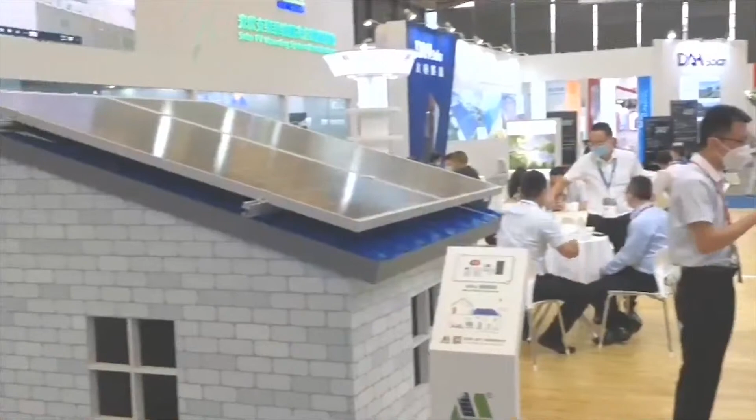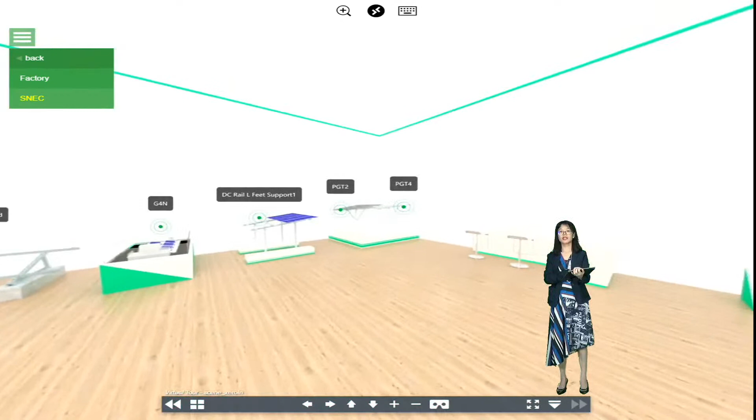To show more details of our roof mounting systems, I would like to bring you to our virtual stand to introduce more details. Now I am at the front of our virtual stand. Okay, let's go inside. Now I am inside our virtual booth, almost exactly the same as our real stand. I'll just bring you around.

Sorry, it's stopped due to the software reading speed, but no worries, let me try to go back. Okay, we go inside again, trying to go ahead. Okay, it seems the speed is much better now.

This year we have displayed our TPO new soft rooftop solution and our adjustable tripod. Alright, it seems the virtual booth is not very smooth.

Now it's working. As we can see, we have a trapezoid metal roof support, a tile hook system, and we're trying to zoom in. We have a symmetrical roof mounting matrix. Let me show a little bit of detail about the trapezoid roof solar mounting system. So it's going, it's operating. Okay, great, we get this model.

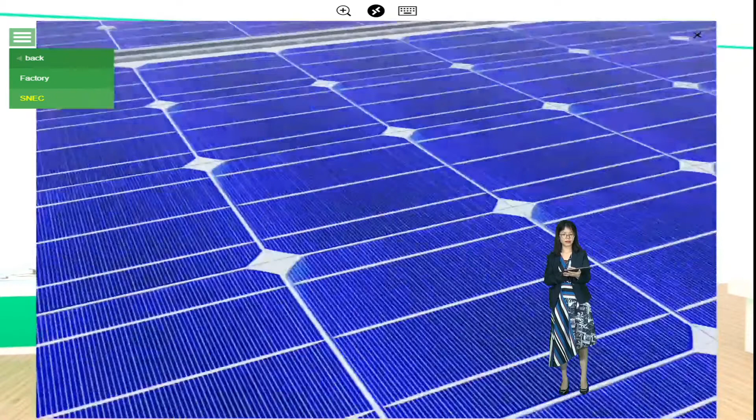Okay, trying to make the direction better so that we can see more details. Alright, this is the system combined with a trapezoidal roof clamps with the L-feet and MA rail. And since the software is not very smoothly operating, so it's okay.

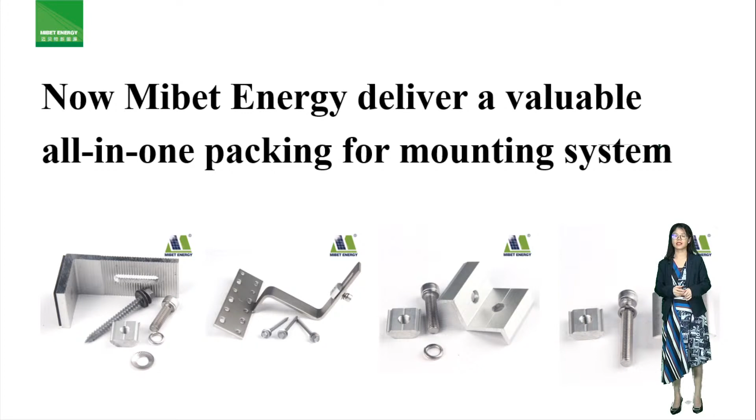So now Mibet, our company, Mibet Energy, delivers a very valuable all-in-one packing for mounting systems, no matter for L-feet system for the tin roof, the tile hook, or the tilt legs for flat roof and the low tilt angle metal roofs. So what is the all-in-one Mibet solar mounting system kit?

We can calculate by panels. Like one item, a 4-panel kit, we only need to have 2 pieces of rails with 1 box of tin kit, or 1 box of tile kit, or 1 box of tilt kit.

Also, because you know the rail is lengthy, usually standard length is 4.2 meters, and for other components like middle clamp and end clamp which are small components, for better warehouse management and transportation, we also can separate the rail from the other components, all items in the same kit. Let's go to the next part.

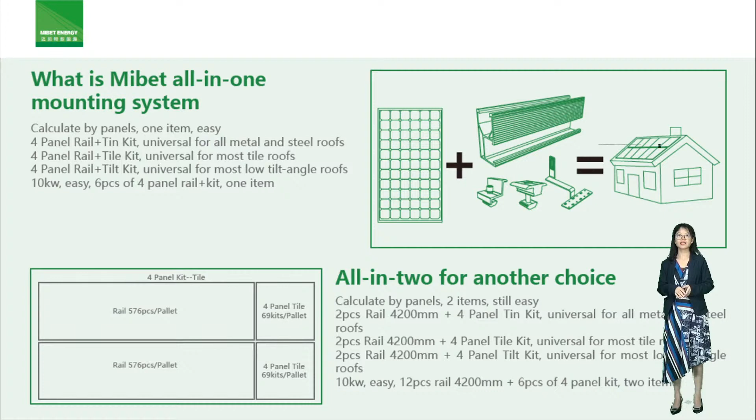For example, this is our 4-panel tile racking system. That means we include all the components for a 4-panel installation, 2 pieces of rails. For technical data, we can achieve installation for 5 to 45 degree tilt angle of the roof itself. For design standard, we have Australian standard, JIS standard for Japanese market, British standard, and American standard.

Packing, we usually pack in 4-panel kits, around 800 kits for a 20-feet container, around 2,000 kits for a 40-feet container. Okay, we go to next part.

So this is the list example for both portrait type panel installation and landscape type for 4-panel tile kit installation. As you can see, we not only include the basic installation components like rail, rail joiner, end clamp, middle clamp, tile hook, we also include the grounding components and cable clips to make everything in the same kit, considering the safety factor and better uniform installation for the DC cables. Okay, let's go to next part.

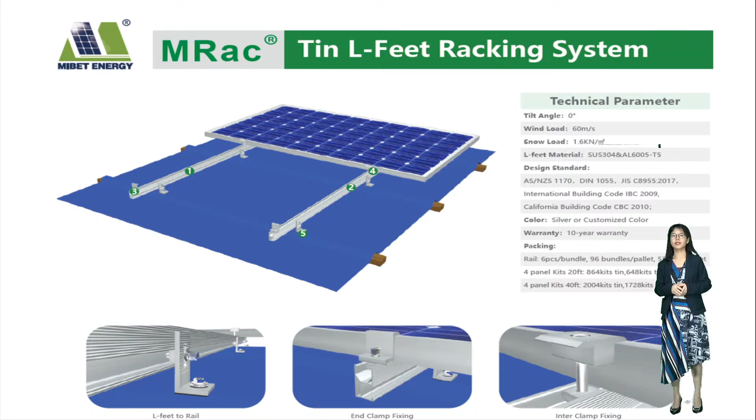We also show the example of the tin kits list, components list for 4-panel, 6-panel, 8-panel, 10-panel, and 12-panel. These 5 types of panel quantity are the most universal and most hot-selling ways of combination of solar panel quantity for the tin kits and also for tile kits.

Except the silver kit, we also have a black color available for our rail joiners and clamps, L feet, all the aluminum components. As we know, more and more solar module frames are using black color now.

So when the metal roof's tilt angle is only like 5 degrees or 3 degrees, very low tilt, if we only install the tin kit with L feet, the reflecting degree from the angle of the solar module to the light is not so good. Then the power output for the solar module will be affected.

So we have another very smart system we named the tilt adjustable racking system, which can achieve 10 to 15 degree installation, 15 to 30 degree installation, and 30 to 60 degree installation, suitable for most markets like Europe, USA, Australia, Southeast Asian countries, African countries, and South American countries.

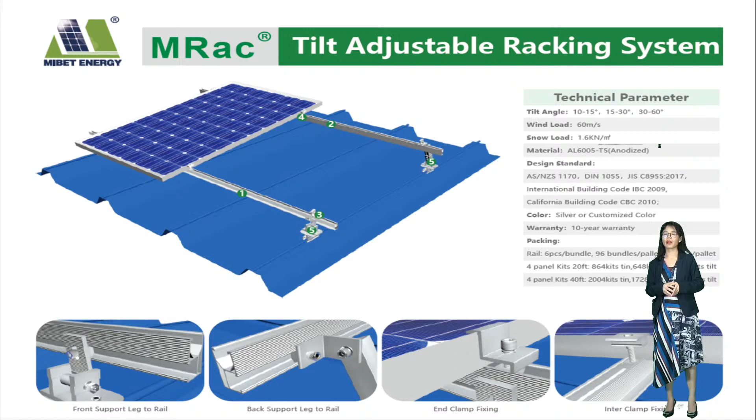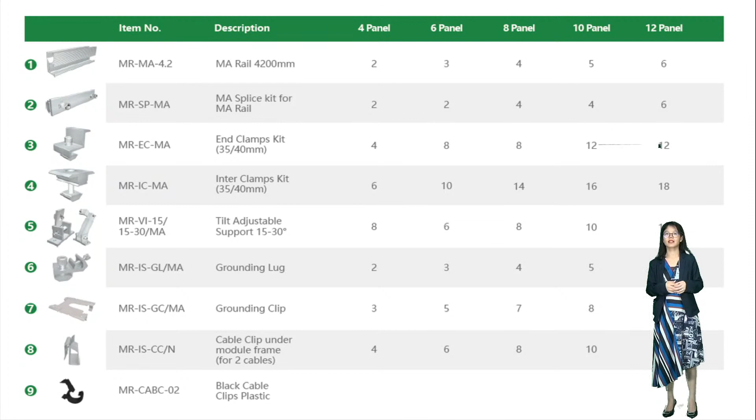So we also showed the example list for 4 panels to 12 panels. As we can see, the tilt system combines 2 pieces of support structure, one front leg, one back leg support kit. We usually combine them together as one pair. This is a different packing way compared with most competitors.

Okay, we go to the next page. As I mentioned just now, except for the basic components to fix the solar modules on the rooftop, like rails, tile hooks, L feet, tilt legs, the middle clamp and end clamp, and rail joiners, we also consider the safety of the workers. The safety.

We also consider safety as a very important factor for the workers, so the grounding system is very important. And also the other safety is for the system itself. If we don't include the grounding function with our solar system, as we know the solar system is used for generating electricity, when it's raining or there's lightning, it is very dangerous. So most regulations in different countries require our solar system to be grounded. We usually include the necessary grounding components, like grounding lug, grounding clip, in the components box, and also the rail joiners are combined with a grounding function.

When we install the system, as we know, the DC cable is quite long, usually longer than needed. So if we don't have anything to fix the DC cables, they will drop onto the rooftop, which will also arouse some risk of electricity shock. So although the cable clip is a very small component, we still recommend our customers include them in our kit.

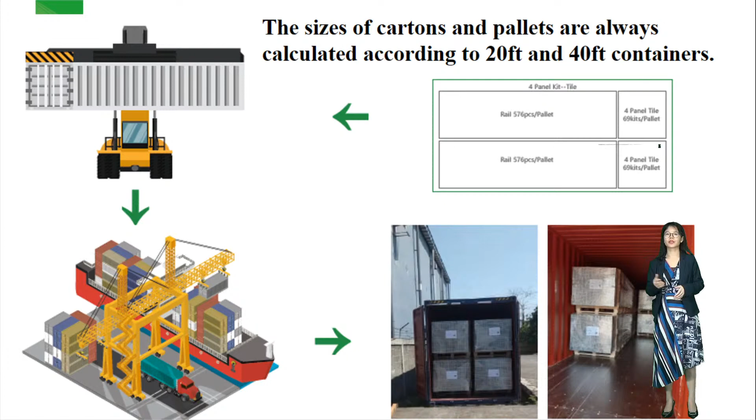Usually our rail packing is packed 6 pieces per bundle, 96 bundles per pallet, 576 pieces per pallet. For a 20-feet container, it can load 864 kits for tin, and 648 kits for tile, 506 kits for tilt. For a 40-feet container, the numbers can be a little bit more than double.

Some market information for our roof solar mounting kits. We currently have stable distributors, more than 20 in different countries, like in Europe - Spain, Italy, Portugal, Poland, UK, Germany, and the Netherlands. We also have very strong distributors in Australia, Japan, and Southeast Asian countries like Thailand, Singapore, Malaysia, Indonesia, and Vietnam. So our current annual production capacity for the solar roof mounting kits is more than 2 gigawatts.

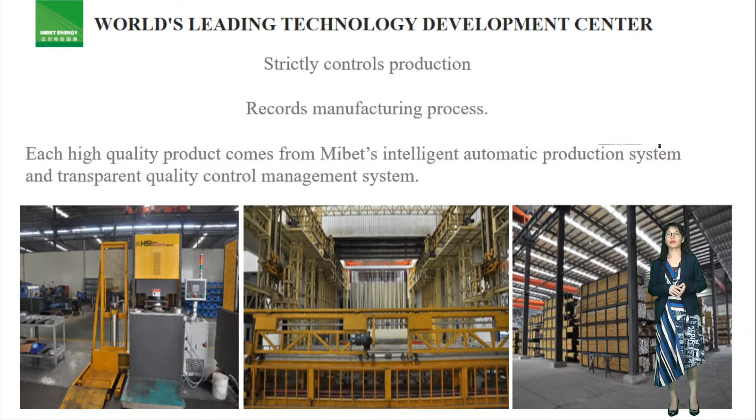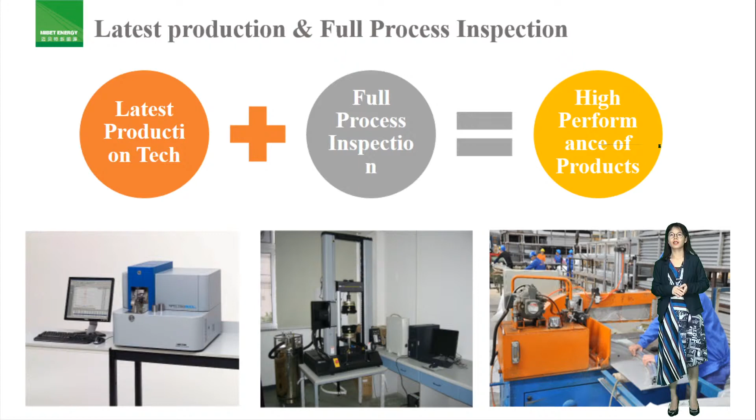In the middle is the tensile machine to test the strength of our components. We have the spectrometer to test the material. We have the salt spray tester to test the anti-corrosion feature of our surface treatment, for stainless steel or for anodizing on the aluminum parts.

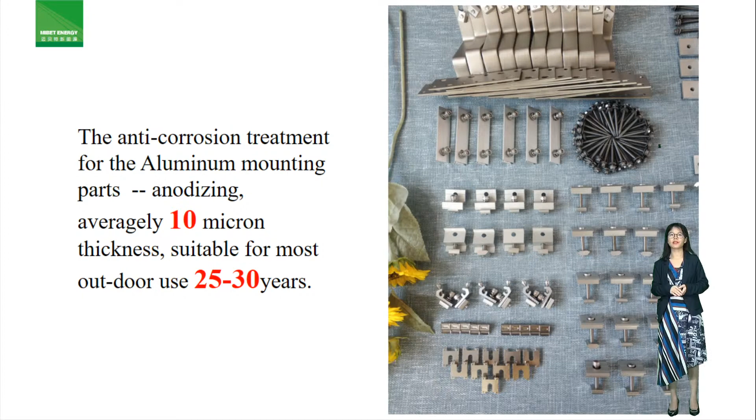Our aluminum mounting parts have an anodizing thickness averaging 10 microns, suitable for most outdoor use for 25 to 30 years. If the place is quite close to the sea, we can support treatment up to 15 microns.

So our lead time is also a very important factor to assure better cash flow. Our lead time is quite short, usually 7 to 10 days for 40-feet container kits, about 4 megawatts. As I mentioned, the short lead time ensures quick turnaround of our partners' stock and cash flow. That means you don't need a very big warehouse, and you don't need a very large volume of cash flow for the mounting system.

So for the second part, I would like to share some typical and new innovative roof solar mounting system solutions we launched this year during SNEC.

The non-penetration solution for flat roof. As we know, on sunny days we enjoy the return on investment from our solar system. But what about rainy days? If we penetrate the roof, water may drop into our houses - what a headache problem. So the non-penetration solution is very attractive and a new trend in the market. We can enjoy the investment of the solar system without worrying about leakage from penetration.

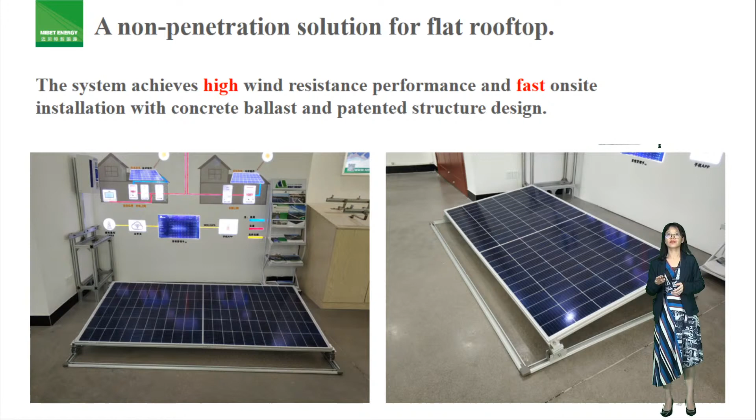The photo shows our second generation Matrix ballast system for flat roof. As you can see, it's a kind of modular design. We have different large sizes of solar modules compatible up to 2.3 by 1.5 meters, with thickness ranging from 30 to 40 millimeters.

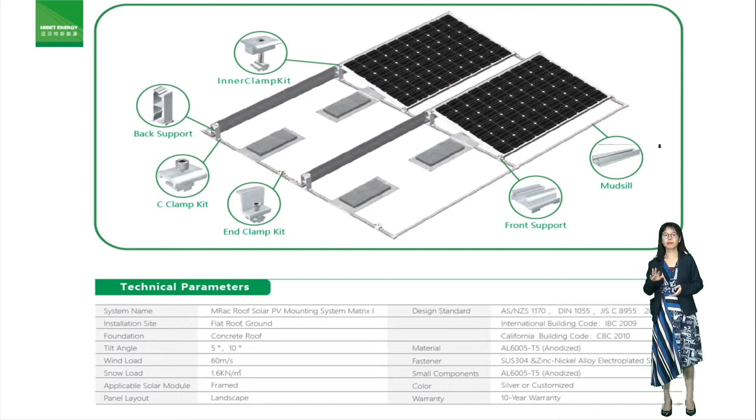Some technical details of our roof Matrix system: this is the one-side installation, and the two-sides installation is suitable for lower latitude areas like Singapore and Malaysia.

Our second solution is also non-penetration, but for metal roof. Metal roofs are usually used for factories, warehouses, and some shopping malls. If the metal roof is penetrated, it's actually more of a headache to some extent, because usually the roof covers a big area. So we have a lot of roof clamps suitable for non-penetration solutions, like for clip lock type. We have clip lock options from 18 to 700, more than 20 items.

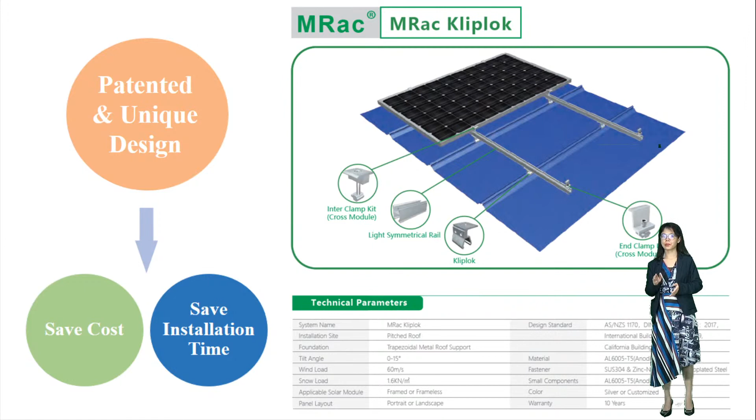Our MRac Kliplok is a patented and unique design. It can save you installation time and save cost. We make all our roof solutions trying to be simpler and easier to manage, to help improve installation and get more and more business.

For rails, we also have different designs available. We have the MA rail, the T-slot rail, the DC H50 rail - most of these are top and side channel. We also have top-bottom channels like the symmetrical rail H39.

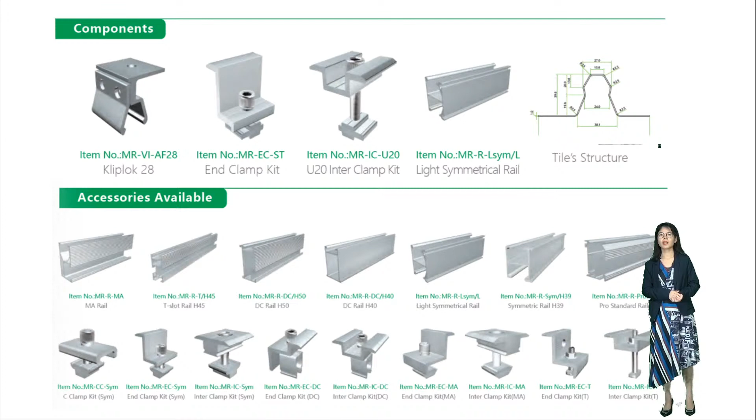Besides the Kliplok roof type, we also have standing seam clamps, more than 15 items available, both for small base and big base designs. More standing seam demonstrations are also compatible with different kinds of rails: the MA rail, T-slot rail, DC H50 rail, the symmetrical H39 rail, and Pro standard rail.

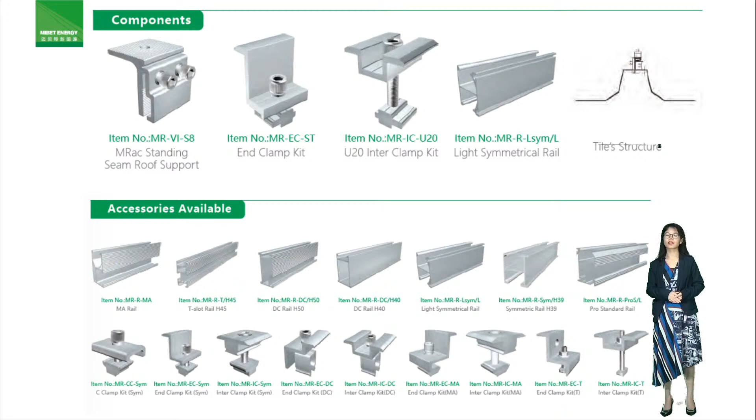And the trapezoidal metal roof clamps for the mounting system. For trapezoidal roof, we have whole side fixing and one side fixing, and we also have some covers outside to make the waterproof better.

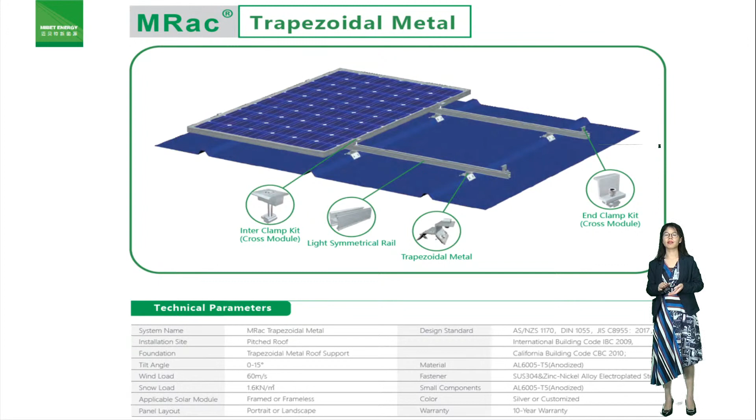More demonstrating technical parts of our trapezoidal metal roof solar system, and also different kinds of rails compatible.

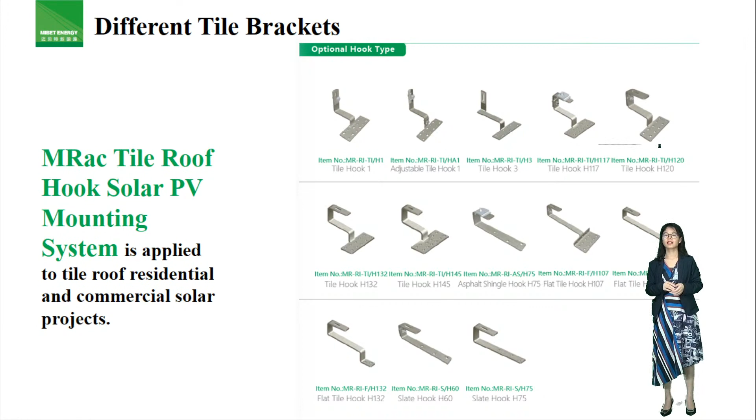For tile roof, we know the tiles popular in different markets is different. We have Roman tile, flat tile, stone tile, slate tile, and different kinds of tiles. So we also design different tile hooks and brackets to be compatible with different tiles in the market, like most European market, Australian market, and USA market.

The system is for varied shapes and sizes of roof tiles, fixed on wood or steel roof beams or battens. The wind resistance feature is also quite good, which can reach 60 meters per second.

The third roof mounting solution I will introduce is our fixed and adjustable triangle roof mounting solution. If the tilt angle is only for one country, or the latitude range is not so large, then we only need one fixed angle to save material. If the latitude range is quite large, like in China from southern to northern where latitudes are quite different,

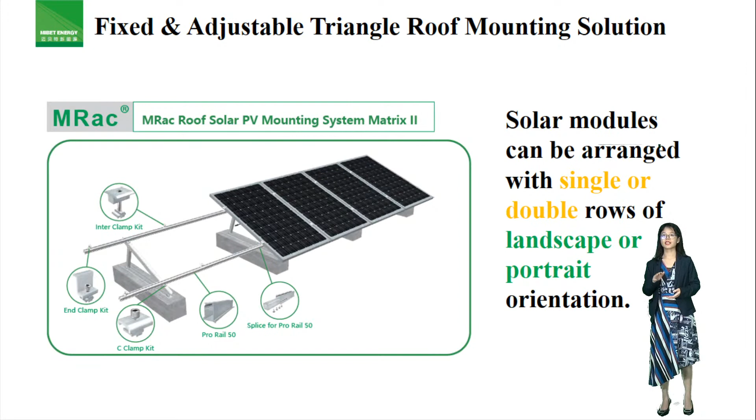then we can have the adjustable triangle or tripod to achieve different installation in different cities. We have different types of triangles available for 1 row portrait, 2 row portrait, 1 row landscape, or 2 row landscape.

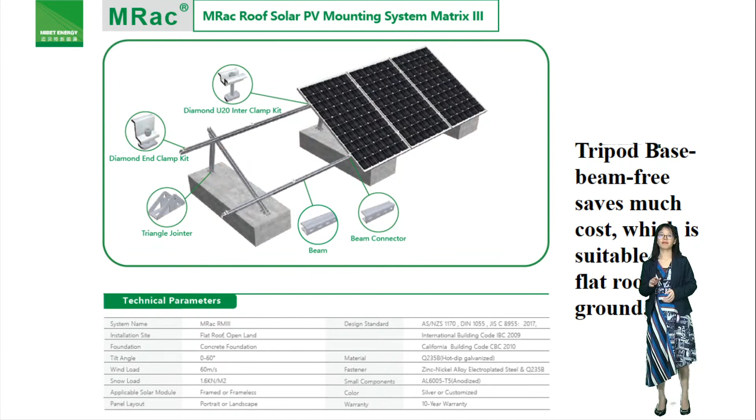The tripod base beam free solution can save much cost, which is also suitable for flat roof installation and ground, some small to medium scale ground installation.

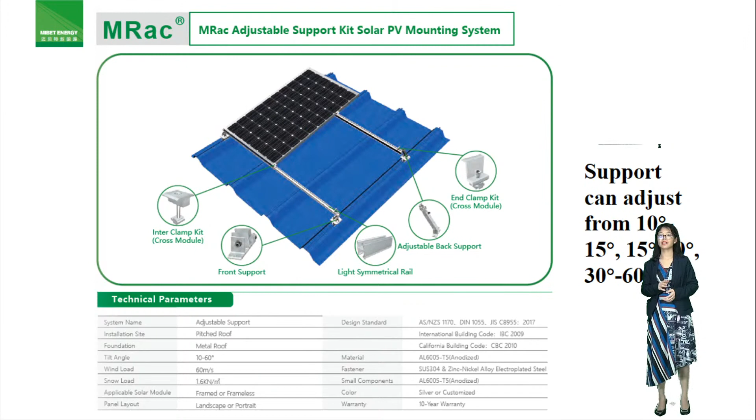Listing the compatible rails.

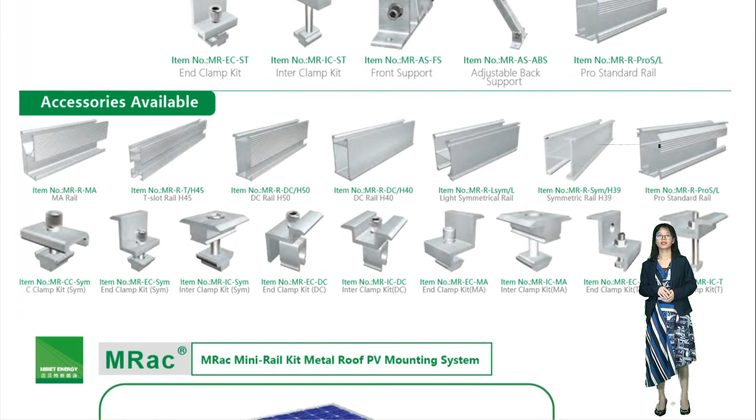The last roof solar mounting system I would like to introduce today is our mini rail kit. Mini rail, we have different heights available from H18 millimeter to 50 millimeter. We mainly have 18, 25, 35, 45, and 50 millimeter to achieve different distance from the solar module to the metal roof.

So the lower the height is, the lower the cost is. The higher the mini rail is, the better the cooling factor for the solar module is. Okay, next part.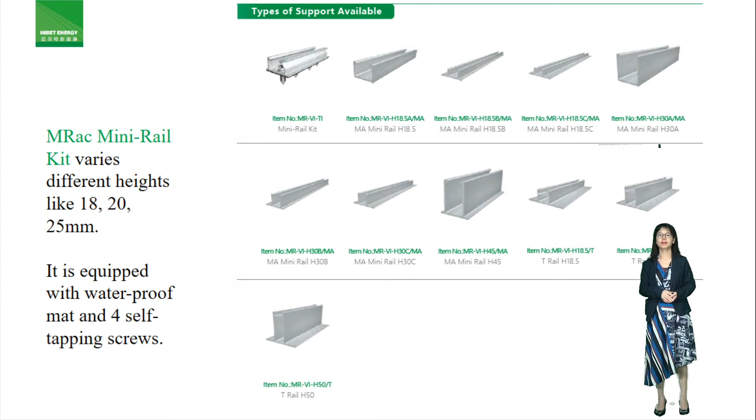We are showing different types of mini rails available. The mini rail still can fix with the long length rails if you want to fix the system more uniformly.

And the L feet and hanger bolt kit, if we don't want our solar system directly sitting on the metal roof, we can use the hanger bolt system to raise the height from the rail to the surface of the metal roof.

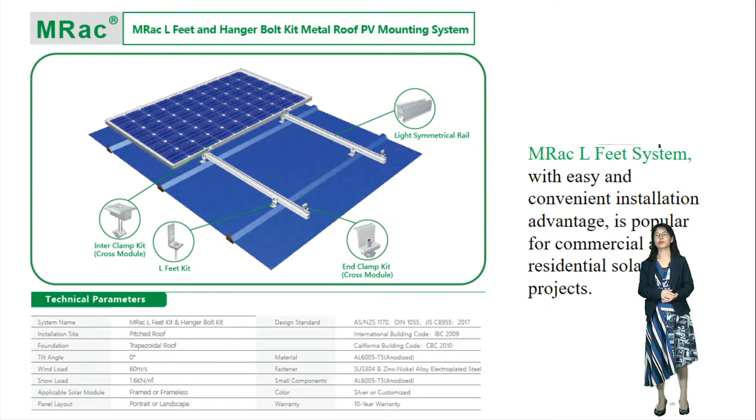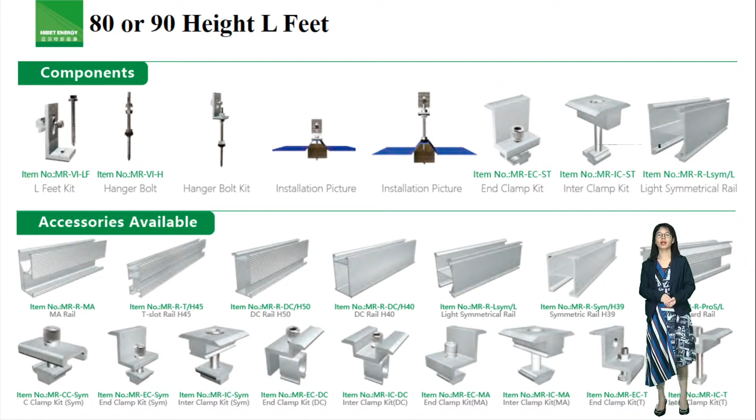Showing the different types of hanger bolt and different kinds of rails compatible with our hanger bolt and L feet system.

One more system we named independent roof clamps. That means we don't need to install this kind of clamps with the rails. We can directly use this trapezoidal metal roof support to fix the solar modules with the middle clamp and end clamps, which can save a lot of installation time and cost.

We are showing some more details of the independent roof clamps. We have different types available, fixed at 2 sides, fixed at 1 side, and also some different roof types.

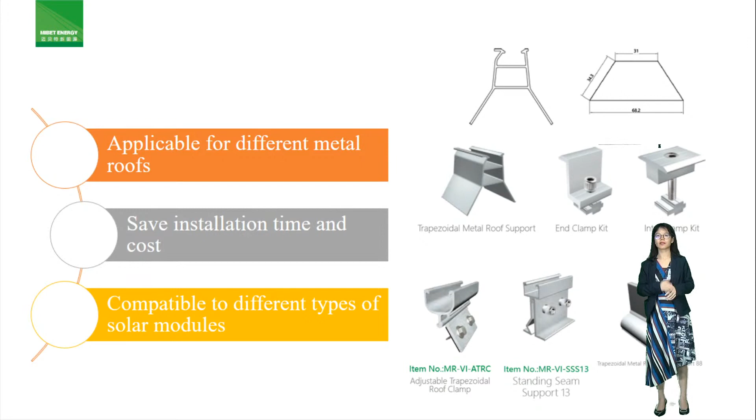Some technical parameters: it is suitable for pitched roof, and the tilt angle can achieve 0 to 15 degree. Wind load can resist 60 meters per second, snow load 1.6 kN per square meter. For applicable solar modules, framed or frameless. Layout, portrait or landscape. And the warranty usually is 10 years.

That's all about our roof solar mounting solutions introduction. Next part, I will bring some main features.

I'm back. So next part, I will introduce our background and history of our company.

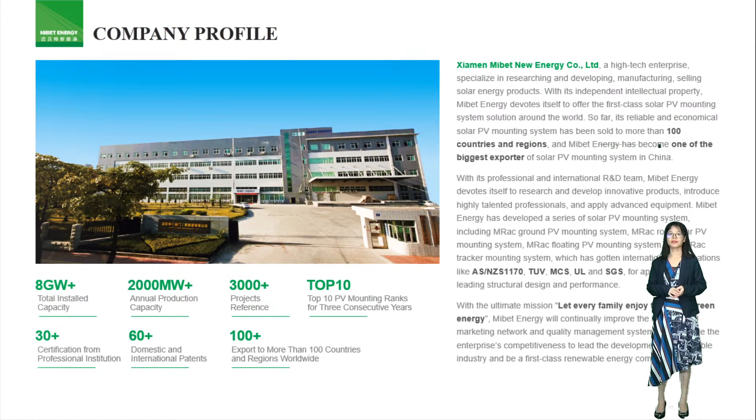Some main history of our company. Our company was established in 2012, and we created the MRac brand in the same year, stepping into the Europe and American market.

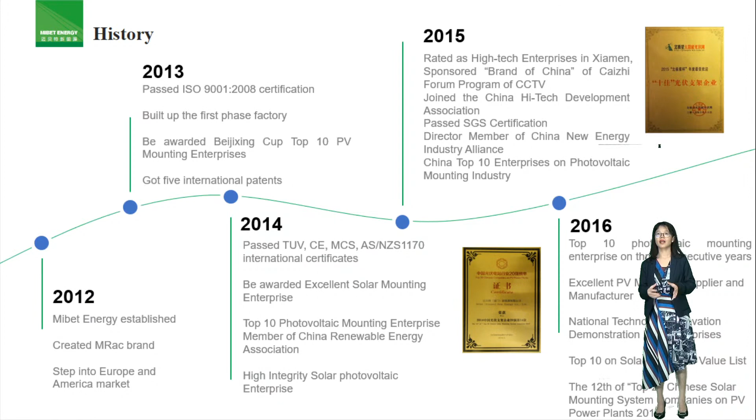We passed ISO certification in 2013, and we passed more certificates like TUV, CE, MCS, AS/NZS in 2014, and we got a lot of nominations in 2015 and 2016.

In 2017, we got the Xiamen Technology Small Giant Enterprise award from Xiamen City Government, and in 2018 we were rated top 10 solar PV mounting system brand. In 2019, we were nominated as a growing small and medium-sized enterprise by Xiamen City Government.

In 2020 to 2021, we are targeting to be the top 1 roof mounting system brand in the Australia market, and also to gain more market share from Southeast Asian countries, Europe, American countries, South American countries, the Middle East, and African countries.

Our production capacity for roof solar mounting this year is more than 2 gigawatt. Our floating system production capacity, we are trying to expand from 300 megawatt to 800 megawatt. We are trying to get involved in more large solar ground projects like solar tracking systems, bifacial mounting system projects, and commercial carports.

We are showing some more equipment for testing and inspections. In our global market, our top 3 markets are APAC countries like Southeast Asia, Australia, and Europe.

And North Africa and South Africa. Except for these countries, we're also doing good business in Japan and the China domestic market. Besides this, we also have markets in South America and North America.

That's the part I will introduce about our project reference. For floating systems, we have a 2.5 megawatt project in Beijing and 1 megawatt in Shandong province.

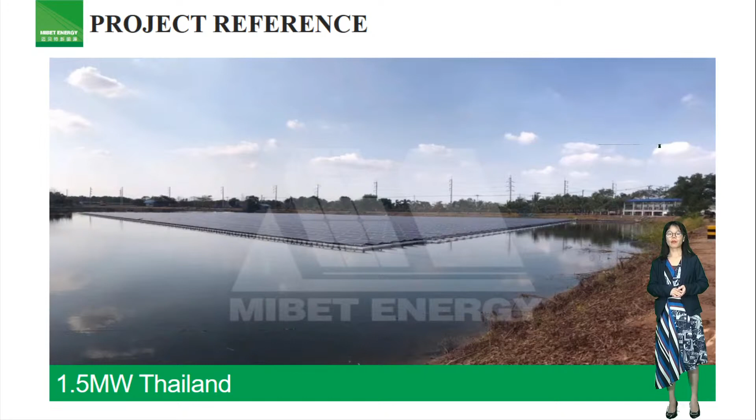We have 1.5 megawatt in Thailand, 1 megawatt and 1 megawatt in China and Thailand, and 1.5 megawatt in Zhejiang province.

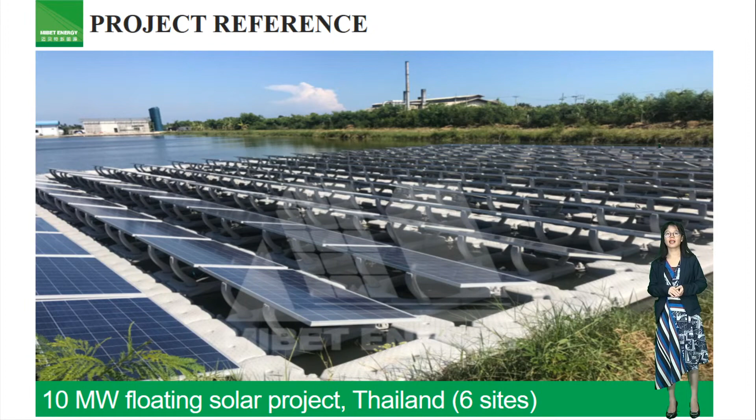A 10 megawatt project combined with 6 sites in Thailand, 58 megawatt in China, and 20 megawatt in China.

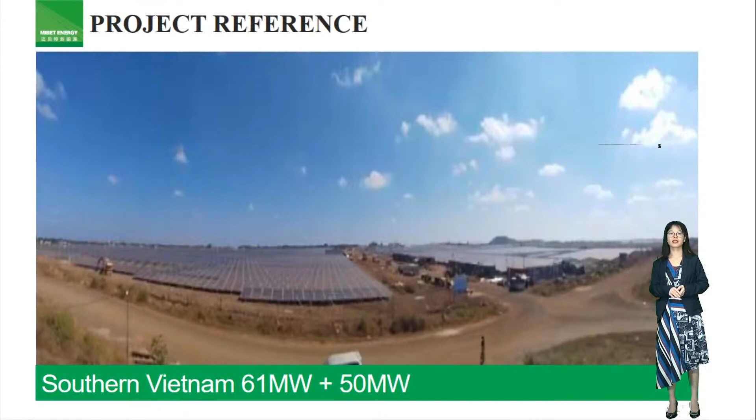For ground mounting systems, 5 megawatt in Cambodia, 6 megawatt in Whyalla, South Australia, southern Vietnam 61 megawatt and 50 megawatt, and in Qinghai, China another 51 megawatt.

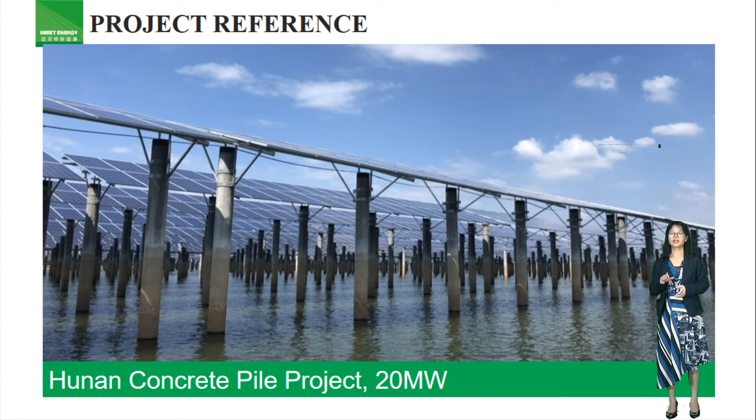In Uruguay, we have a combined 5 megawatt project. In Hunan province, we have 20 megawatt using single pile, concrete pile system on a lake. Then 50 megawatt in Qinghai with concrete foundation.

The carport system in Fujian province, 30 megawatt in Japan, 30 megawatt in Zhangpu, and in Chang'an Hospital, 3.8 megawatt for carport. Steel carport 1 megawatt, also in Chang'an.

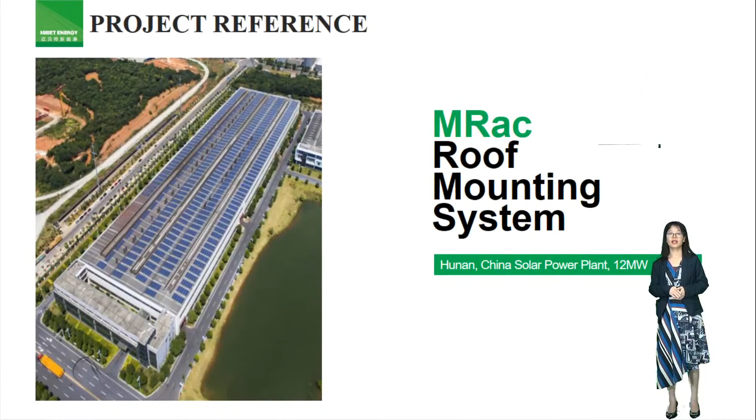20 megawatt in Inner Mongolia. For the last part, roof mounting system: 12 megawatt in Hunan province, 4 megawatt in Thailand, and Philippines we have a 1.87 megawatt project.

Vietnam shopping mall, 500 kilowatt and 2 megawatt. Central Vietnam factory, 1.08 megawatt. Philippines, we have combined different projects ranging from 1.1, 1.6 to 5.2 megawatt.

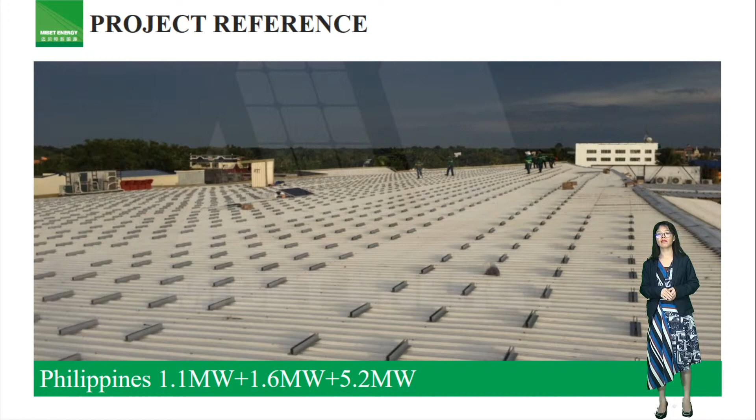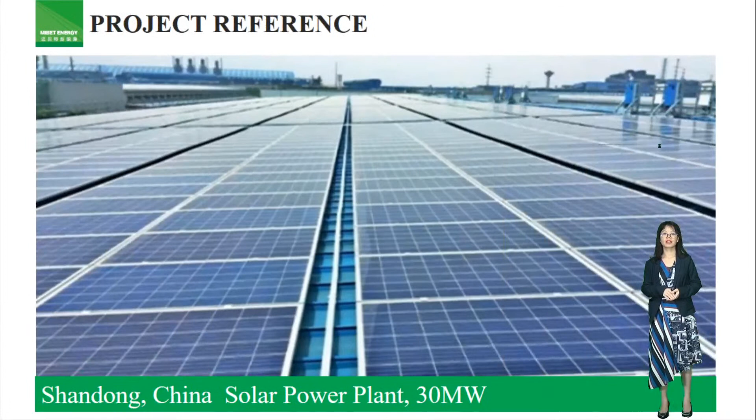Spain, we have a combined 25 megawatt project in 2019. Shandong, we have 30 megawatt in a factory area. And Singapore, we have 35 megawatt installed from the year 2015 to 2019.

And Dubai, we have a 1.02 megawatt project on a flat rooftop. And Malaysia, in the Kuala Lumpur airport, we have 5.6 megawatt.

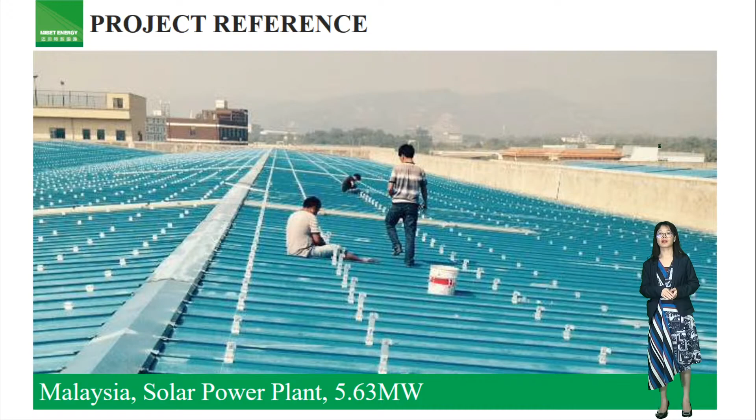Okay, that's all about our company's background and our project reference.

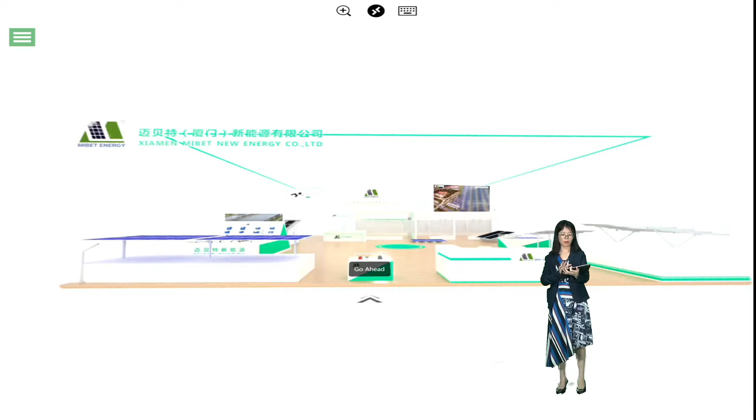So now we are back to our virtual exhibition hall. Just now we had some software problems, but now I hope everything is better. We are going inside our virtual stand.

This year we have a display. I'm trying to zoom in bigger so that you can see. We have displayed a TPO system suitable for softer types of rooftop. Then we have an adjustable tripod.

We have more. We have a symmetrical roof mounting system, matrix 1. We have the tile hook system for residential roofs. Then we have the trapezoidal metal roof support.

I'm trying to show more details. We are waiting for the software to let us see the model. I will turn around.

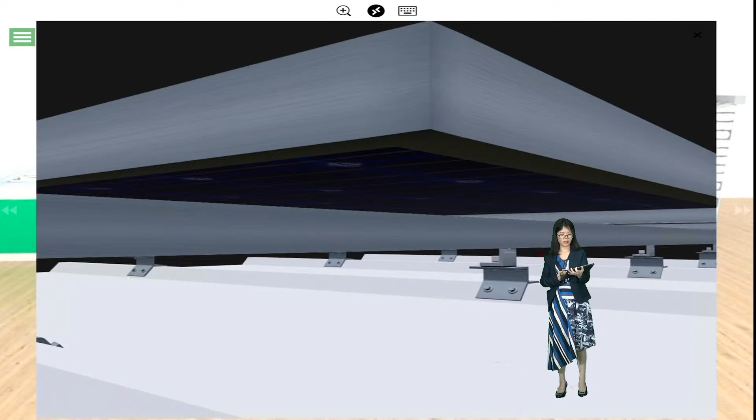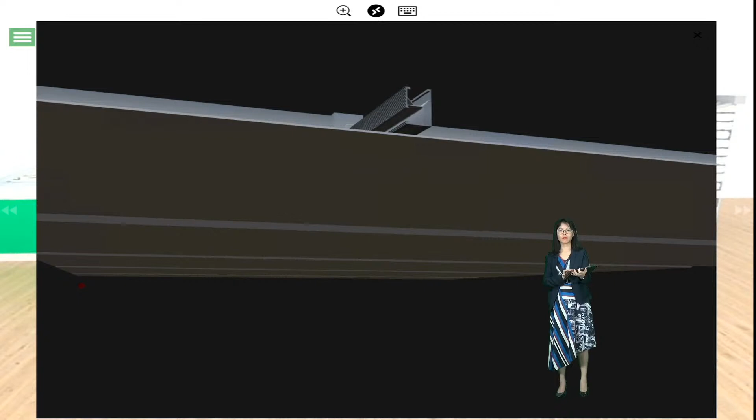Hope it's clear now. This system is combined with trapezoidal roof clamps with the L-feet or MA rail and the middle clamps. We combined the trapezoidal roof clamps with the L-feet to form better height from the solar module to the metal roof surface, which guarantees better cooling for the solar modules, especially in summer days.

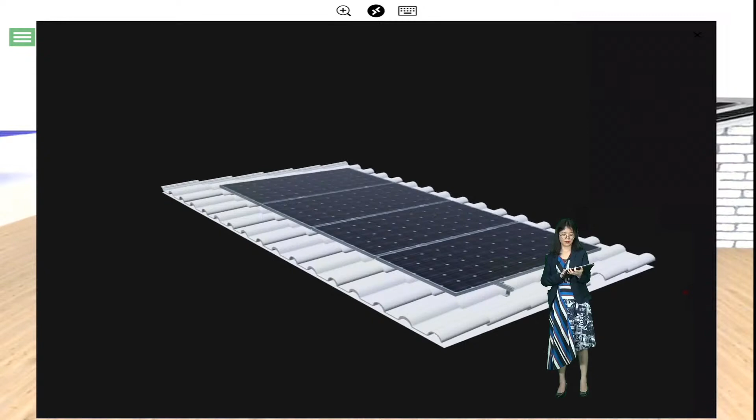Then our tile hook. I'm trying to show details so you can see that. As we can see from the bottom of the model, the tile hook will be fixed on the beams with 3 pieces of wood screw or self-tapping screws. Then the tile hook will be fixed with the rail. On top of the rail, we put the solar modules, middle clamps, and end clamps to fix them.

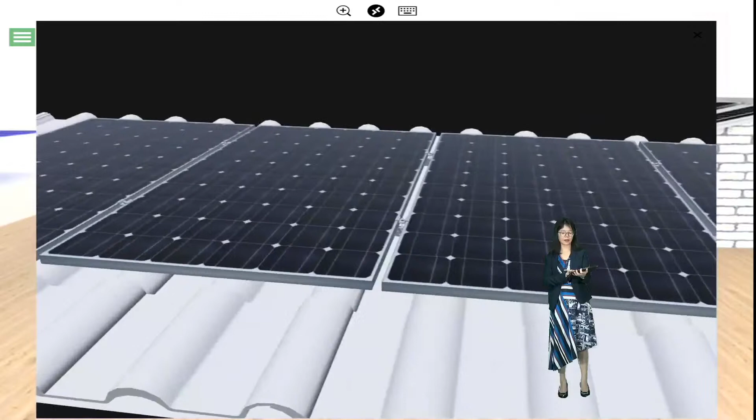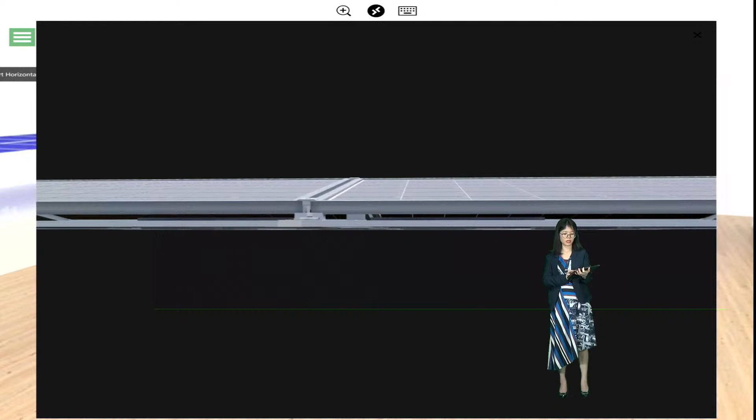Okay, we'll go to our next product, the Roof Matrix 1 for flat roof. This is a symmetrical design, it's the east-west system, and we put the ballast under the solar modules. This is a modular design, and we have the base rails and connectors to make the installation simpler and easier.

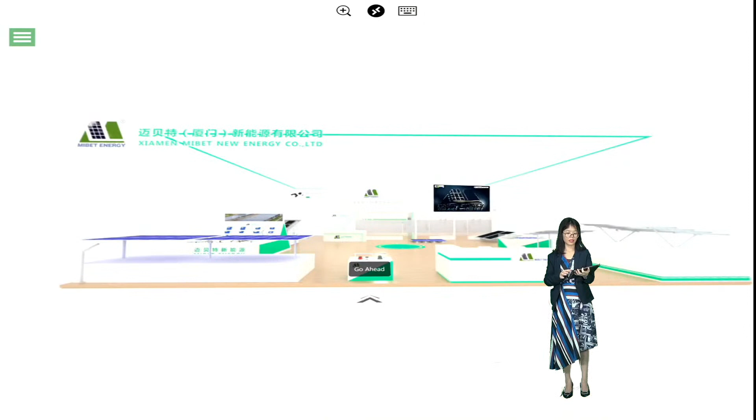Okay, so that's all about the virtual stand introduction.

Now let's welcome back Roger to show more parts. Wow, thank you Michelle, it is great to see you again, particularly thanks after you have a busy schedule at SNEC.

First of all, I would like to ask you, because today is the last day of SNEC, could you give us some summaries about what you have seen over the past 3 days? Wow, okay, this is a very big question for me.

I'm trying to explain as good as I can. This year, because of border restrictions, we are not able to have overseas visitors at SNEC. Still, most of the main players in the market, the top 10 solar module brands, most tier 1 solar module companies, the big inverter factories, the big mounting structure companies, they continued their stand at SNEC, and we received a lot of domestic visitors.

Most of the factories launched their latest products. For solar modules, most top 10 brands launched 600 or more than 600 watt power output solar modules. Several module factories launched solar modules for BIPV. For inverters, they also launched higher output string inverters. And structure companies launched their latest generation of solar trackers suitable for large-scale projects, like this sample for solar trackers.

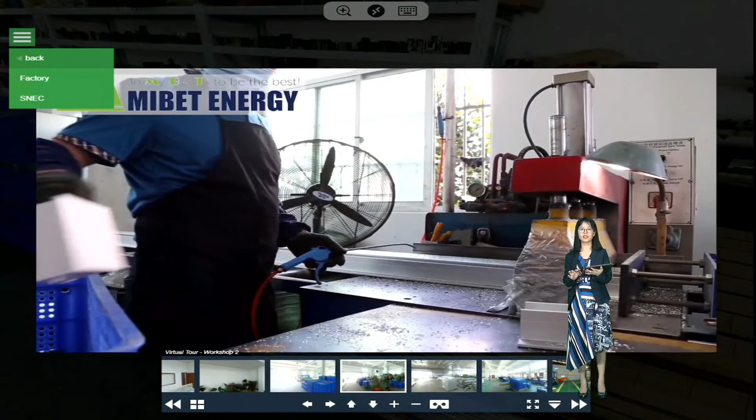Then we go to the next workshop, workshop 2. Now we are inside workshop 2. We have different molds to produce different components—different connectors, end clamps, middle clamps, and different sizes of components. I'll also play another video to show the whole view of this factory. We have covers outside the cutting machine to make it safer. This is the cutting machine.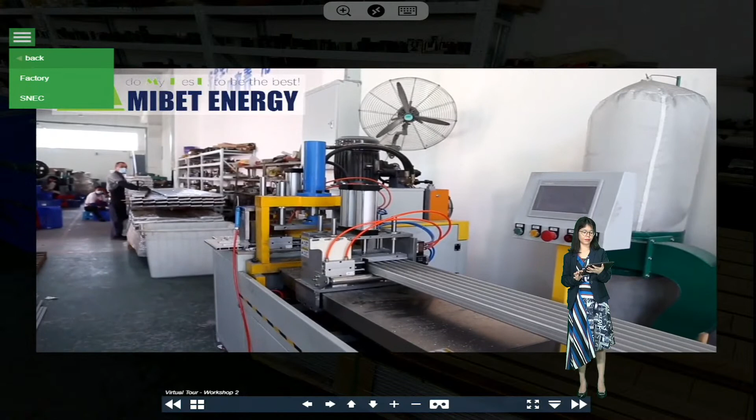The cutting machine. The punching machine. We have around 10 punching machines in this factory.

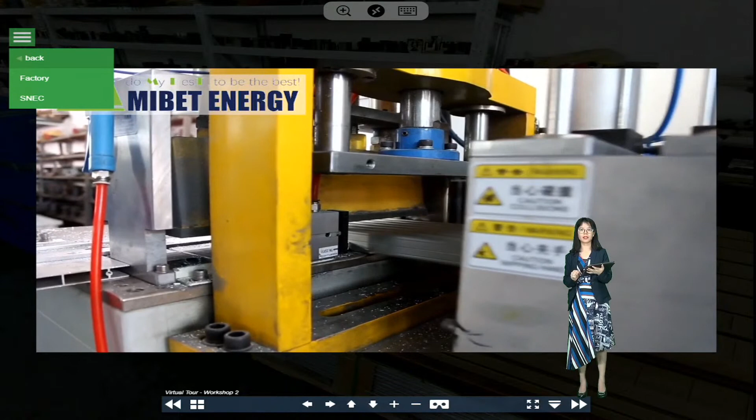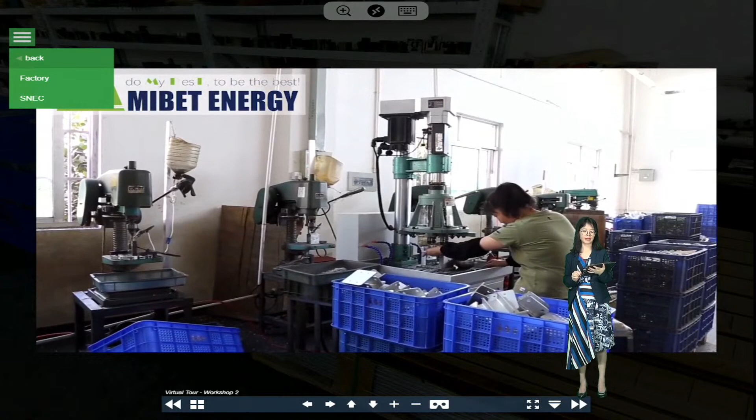I think we have some automatic machines we haven't seen. Let's wait and see. We have some automatic machines producing the middle clamp and the tilt-in nuts. So after the punching machine, we will see that machine. This is the punching machine. Oh, here they are. We have two automatic machines producing the middle clamp and the tilt-in nuts, which can work 24 hours to support better capacity than manual machines.

Okay, let's go to the next factory, our third workshop for machining. This workshop is larger, and usually we produce bigger components here. I'll also play another video to show more details.

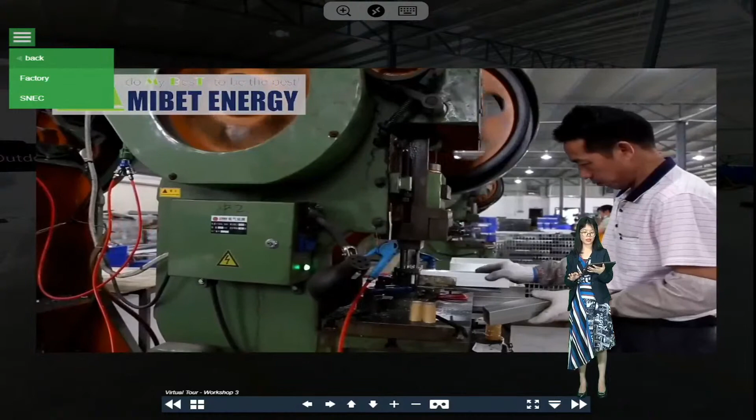We have more than 20 punching machines in this factory, and we have 5 cutting machines in this factory.

Next part, we are in our pre-assembly factory. We have 4 semi-automatic assembly lines for the smaller components. Let's show the video of the semi-automatic lines.

Besides the semi-automatic lines, we also have manual lines to pre-assemble the small components. We have 2 lines. Then we have 6 lines to pre-assemble the big components, like the support structure for the ground mounting system, pre-assembling the posts and beams together.

Now showing our standard packing method. Usually our big components are put on pallets, and small components are put in cartons, and all the pallets can be operated with a standard forklift.

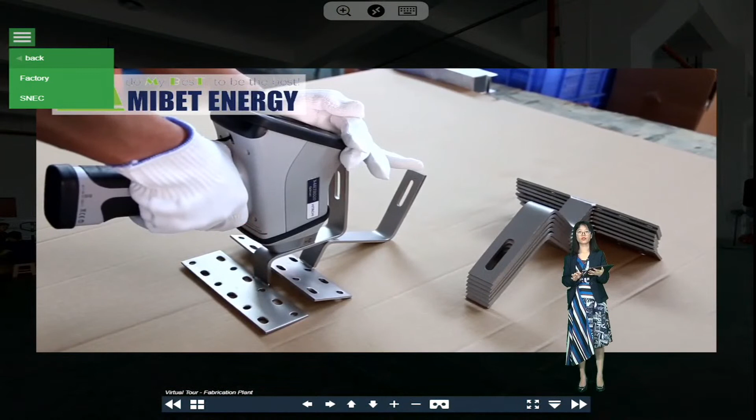Quality control is very important for long-term existence in the market. We have a spectrometer to test the composition of the material, like stainless steel, and we have the salt spray test machine to test the anti-corrosion surface treatment for stainless steel, for the anodizing of aluminum, for hot dip galvanizing of steel, etc.

Now we are in the floater factory. I'll show you around. We have machines to produce the big floaters, walkway floaters, and the connectors. This machine tests and inspects the thickness of the floaters.

Now we are in the warehouse of the floaters. I'll play a video to show more details. This size of stock can support around 1 megawatt of floating project installation.

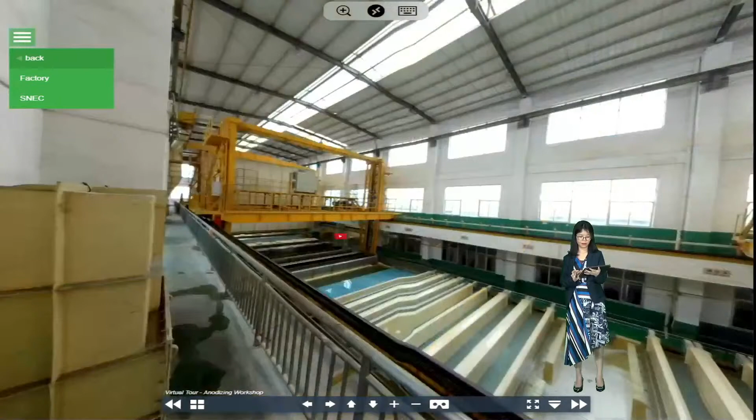Let's go to the next part, our aluminum extrusion factory. We have more than 20 extrusion lines to support enough capacity of raw material. This automatic line shows how the surface of the aluminum is anodized.

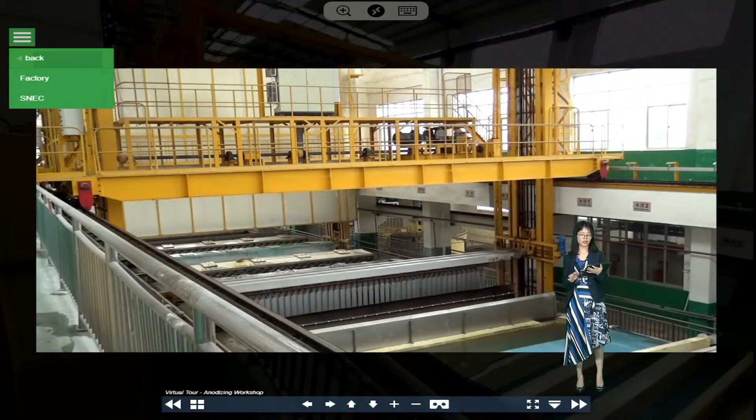Okay, let's go to the next part, our packaging workshop for the rails.

Usually our rails are packed 6 pieces or 8 pieces per bundle, easy for workers to carry on site. Then the bundles are put on pallets, around 1.2 to 1.5 tons per pallet, very easy for a standard forklift to operate.

So the stock waiting, the aging for the rails and the aluminum material. Usually the aluminum extrusion profiles are put into equipment to undergo aging for 4 to 8 hours to make the hardness better.

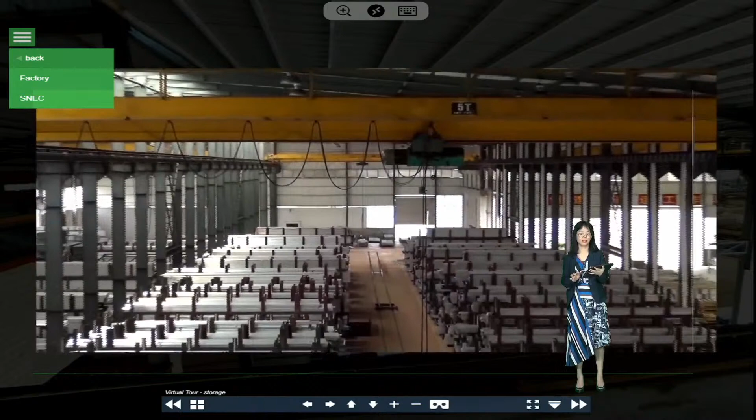I'll show the video to give some more details. The profiles are put on the steel structure, then put into the equipment for 4 to 8 hours of aging.

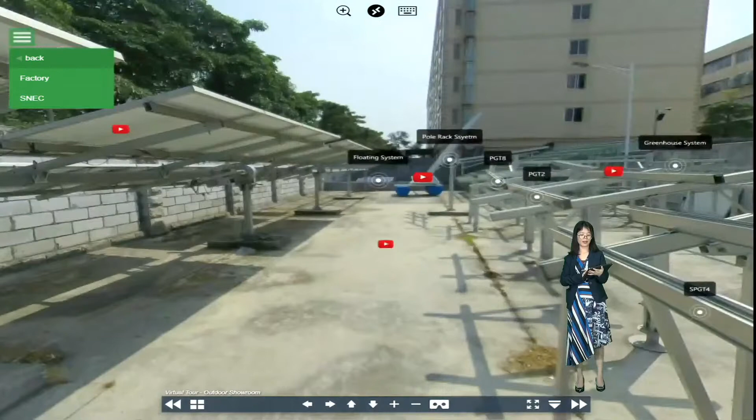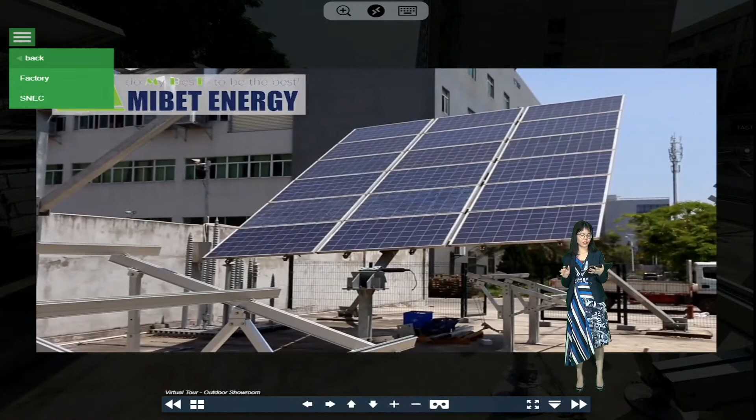The last one is our roof mounting system showroom. We have most of our roof solar mounting components in this showroom. I'll show you around and play another video for more details.

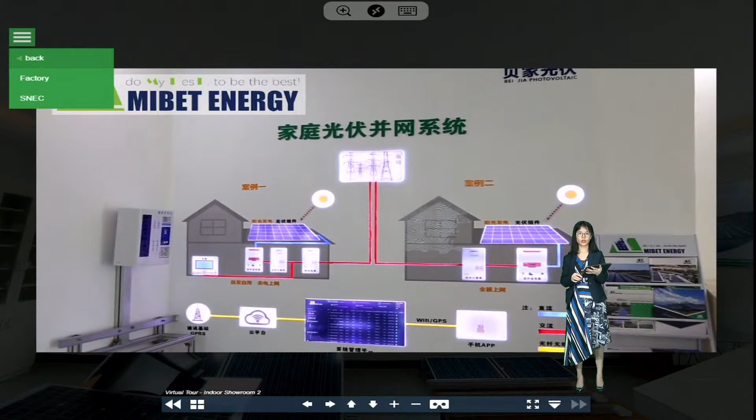Our solar system theory. Then the metal roof: clip lock, standing seam, and trapezoidal. The different components: tile hook, triangle, and different rails.